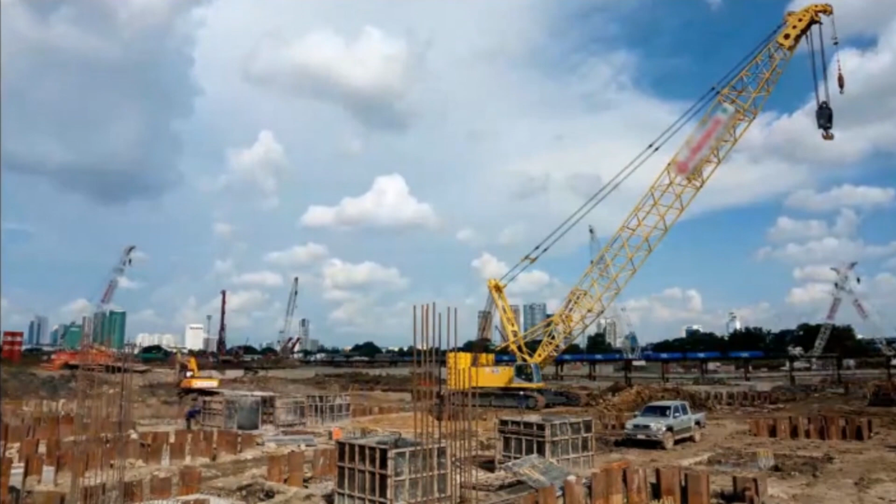Vibrant. Vibrancy is a concept that is deeply ingrained in the building and construction industry, evoking progress, growth, and innovation. We are Vibrant Technology Solutions Incorporated, drawing inspiration from this dynamic spirit. The founders of Vibrant Technology Solutions Incorporated set out to revolutionize the construction industry with a bold vision and a commitment to harnessing the power of technology in construction.

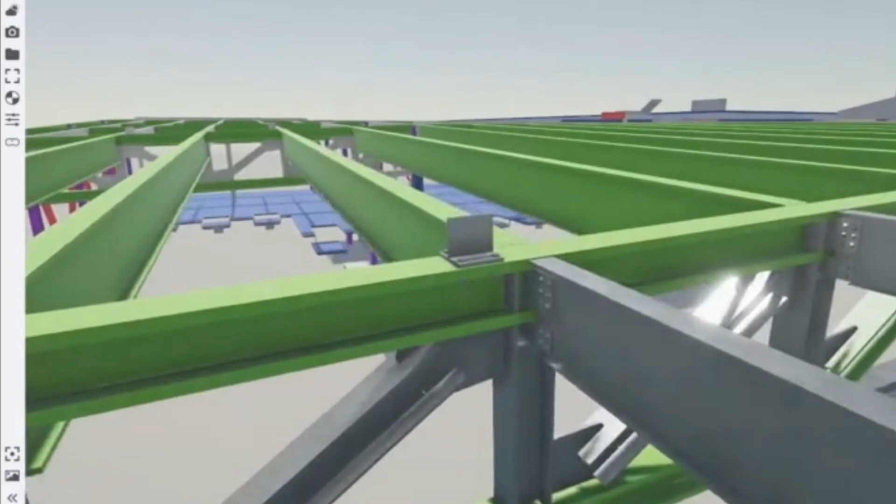Since our inception in 1999, Vibrant Technology Solutions Incorporated, also known as VTS, has been relentlessly and effectively channeling opportunities to our customers to grow and succeed. We are the sole reseller of Tekla Solutions by Trimble since year 2000. As the sole reseller of Tekla Solutions by Trimble, VTS offers a comprehensive range of cutting-edge products and services to the building and construction industry. Our solutions include Tekla Structures, Tekla Tedds, Tekla PowerFab, Tekla EPM, Tekla Structural Designer, SketchUp Pro, and Trimble Connect.

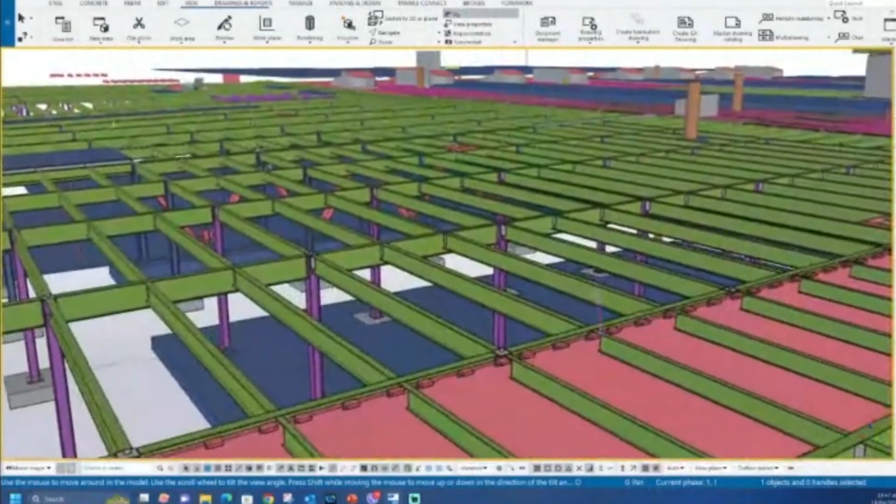We also provide solutions for enhanced project visualization through augmented and mixed reality. Our solution for AR and MR includes XR10 with HoloLens 2 and Trimble Connect AR. VTS is the only authorized training and Tekla Professional Certification Center in the Philippines. In addition, we also provide linear construction material optimization solutions. We offer Raiden Systems, CP Manager, and AutoNest so that construction leaders can optimize their material usage, minimize waste, and streamline their production processes. Overall, we are entrusted by Trimble Inc. with the sales, marketing, business development, and technical support across Trimble's building solutions portfolio. We are one of the leaders of this technology.

We at VTS believe that customer engagement and enjoyment are just as important as delivering top quality solutions. We take pride in channeling opportunities and in fostering a strong sense of community amongst our clients. At the heart of our business, we place a strong emphasis on cultivating meaningful relationships with both our existing and new clients. Our commitment to customer service is unwavering, and we take pride in providing easy to approach local support that is always reliable and transparent. Our goal is that when people think of Tekla Solutions, they immediately think of VTS, a trusted partner and industry leader that is dedicated to helping our customers achieve their goals and reach new heights of success. Vibrant Technology Solutions Incorporated, channeling opportunities. Tekla Solutions by Trimble. Still different, but always better.

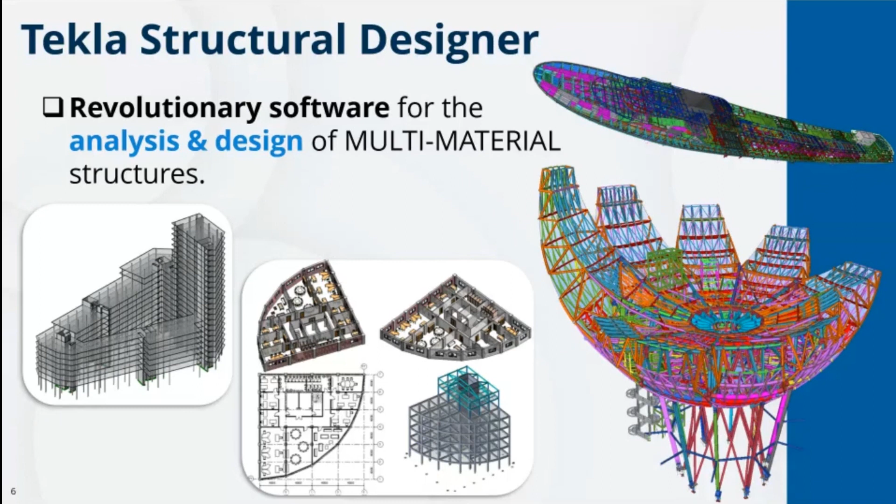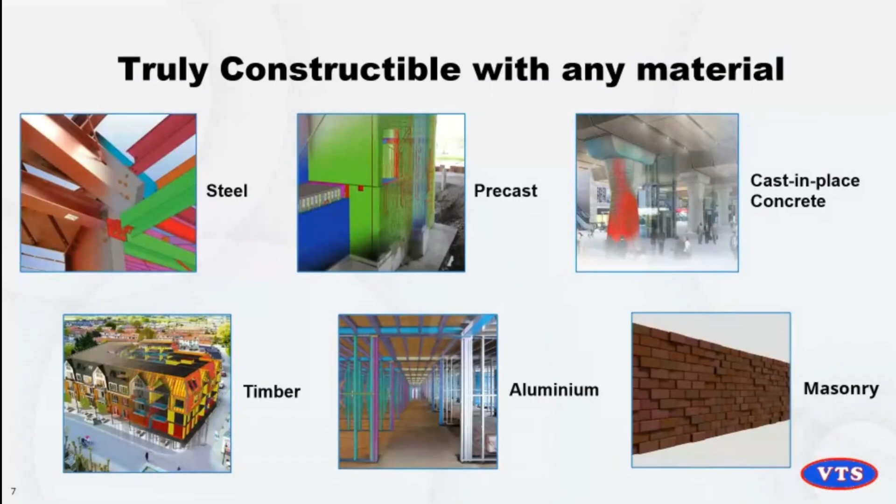So TSD is a solution for faster, more efficient project deliveries regardless of the material. So this is how the software goes beyond traditional engineering tools, allowing you to create data-rich models that streamline structural analysis and easily adapt to changes. With automatic report updates and instant change management, you'll save time and reduce manual work.

So you can also quickly compare multiple design schemes, helping you find cost-effective options for your client in a minute. Plus, with support for a wide range of international design codes, TSD ensures every project meets global standards. So why does TSD matter to you? As industry leaders, you face unique challenges, of course.

We ensure structures withstand typhoons and earthquakes, and we have to meet tight project deadlines while staying competitive in a growing market. So TSD delivers precise seismic and wind loading analysis aligned with NSCP standards, streamlines complex designs for urban settings, and also positions your firm as a BIM pioneer.

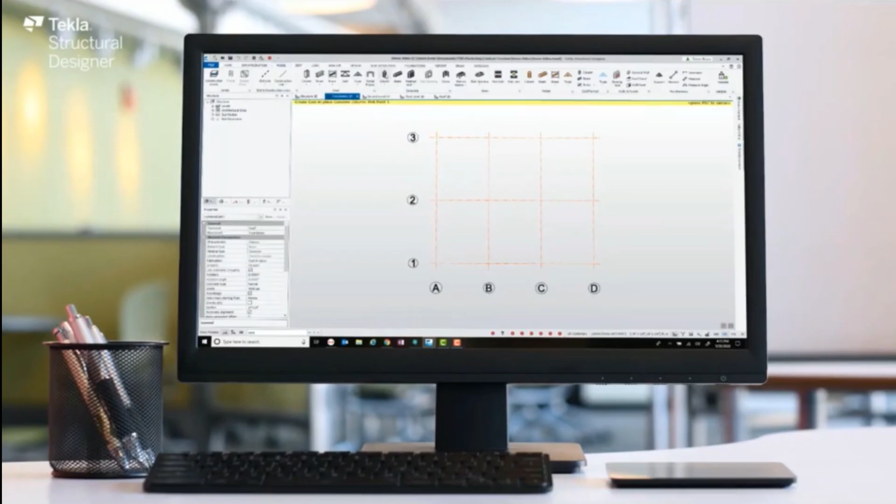So by adopting TSD, you're not just improving workflows, but you're elevating your reputation, winning high-value contracts, and shaping safer communities across the Philippines. So here's a short video for Tekla Structural Designer. Tekla Structural Designer is the revolutionary software that empowers engineers to analyze and design buildings efficiently and profitably. In just 5 minutes, we'll show you how it transforms your workflow.

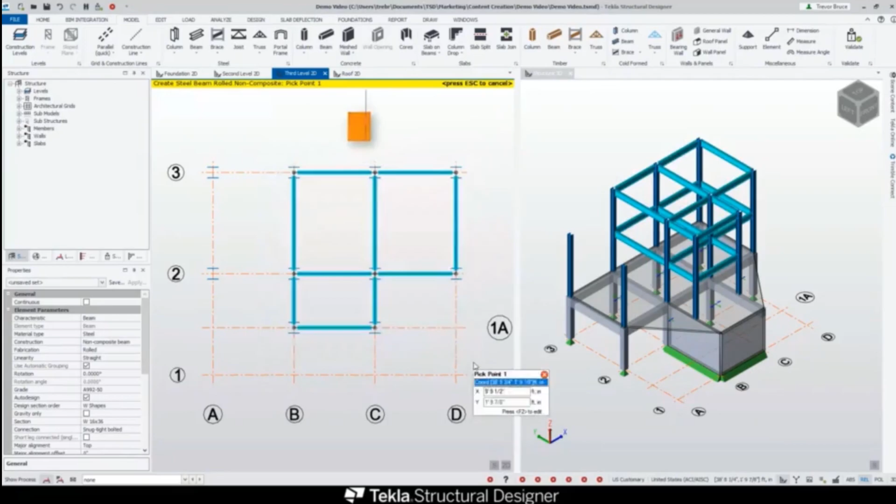TSD is also a fully automated BIM toolpack with unique features to optimize your concrete and steel design. From quick scheme comparison to seamless collaboration, it helps engineering businesses win more work and maximize profit.

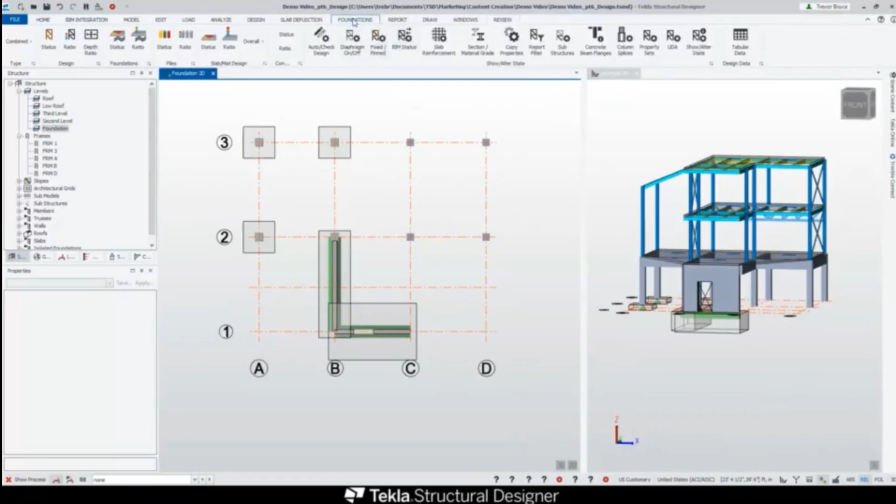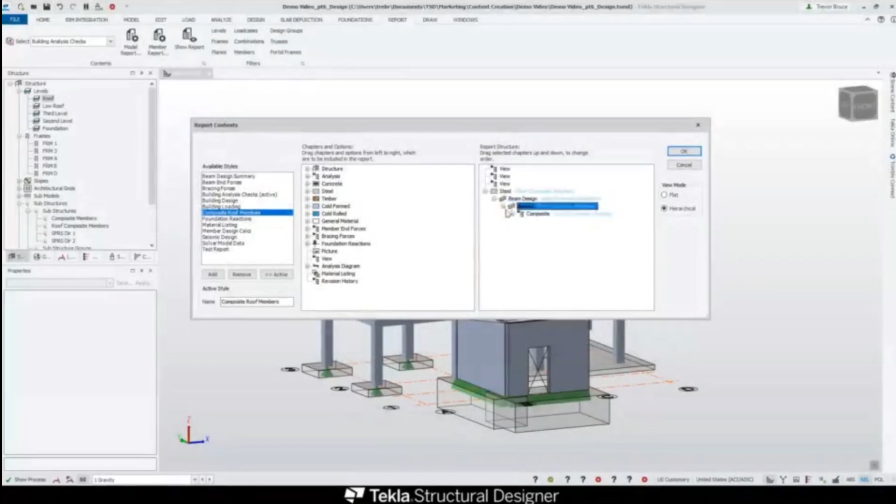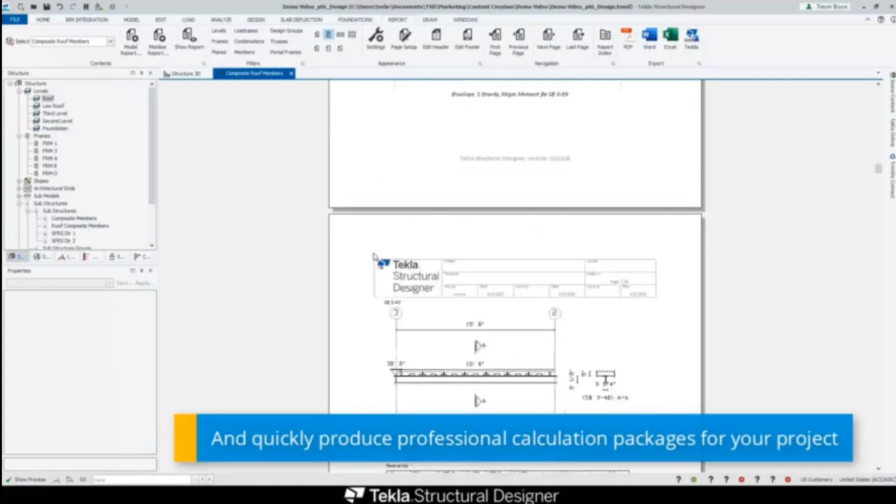So meron tayo ditong pad base, pile cap, strip base wall at saka mat po. And then if needed po na mag-design kayo ng mat and pile, pwede nyo rin pong gawin dito sa loob ni TSD. And sa foundation po, meron siyang generated na reports and drawings po na nakalink na sa AutoCAD. And then at the same time, you can customize po yung report natin based doon sa kung ano yung preference na gusto nating ipakita or ipasa for the permitting.

Okay. So in summary of the key outputs generated by Tekla Structural Designer, it is a powerful tool designed to streamline the work of structural engineers while aligning with the regulatory and documentation requirements. So on the left, we begin with the structural calculation that can be automatically generated by the software. This can be exported to PDF, Word, Excel, or Tedds format, to ensure clarity and transparency in structural design justification. These documents are essential when submitting to regulatory bodies for compliance and approval.

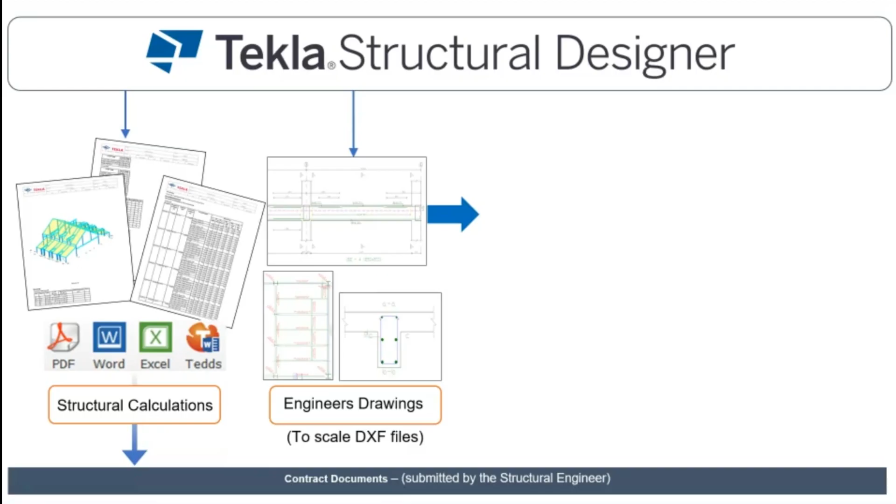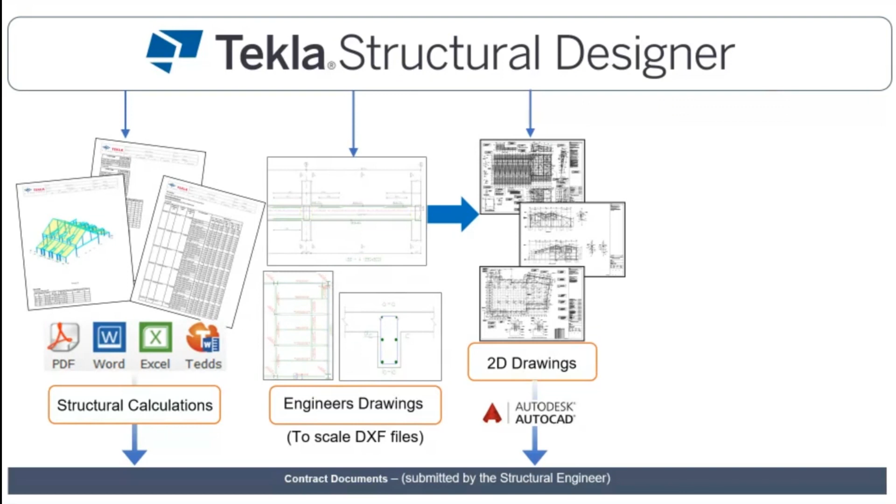So from this calculation, we produce engineering drawings, accurate-to-scale DXF files that form the technical foundation for both detailing and approval. These are particularly useful during permitting. So you can submit po yung ating mga drawings directly na po sa mga local governments natin. They're already accepting na rin po itong mga calculation and engineering drawings na generated sa loob ni Tekla Structural Designer. And then moving further, we link to the drawings using tools like AutoCAD. This includes structural plans, sections, and details formatted to align with the standard submission requirements for building permits and technical reviews.

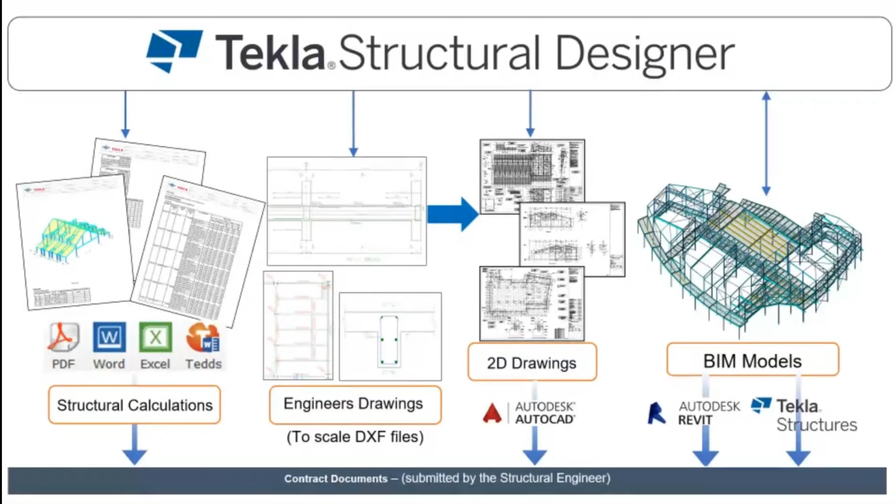So finally, TSD supports the creation of the intelligent BIM model, which can be exported to Autodesk Revit or Tekla Structures, and these models promote interdisciplinary coordination and improve constructability. For the government offices, this ensures that what's approved on paper aligns with what's built in the field. So in summary, all outputs from the calculation to BIM are consolidated as part of the contract documents formally submitted by the structural engineer, making TSD a reliable tool for compliance, documentation, and streamlined review process.

And then for experts like you, efficiency and precision are non-negotiable, but TSD delivers both. It reduces design time by 15 to 25% by automating analysis and design in a single model. This eliminates manual data transfer, cutting errors significantly, with real-time collaboration through Trimble Connect to ensure the architects, engineers, and contractors are aligned, even across the Philippine archipelago. The result: faster project delivery, fewer revisions, and higher profitability. That gives your firm a competitive edge in a demanding market.

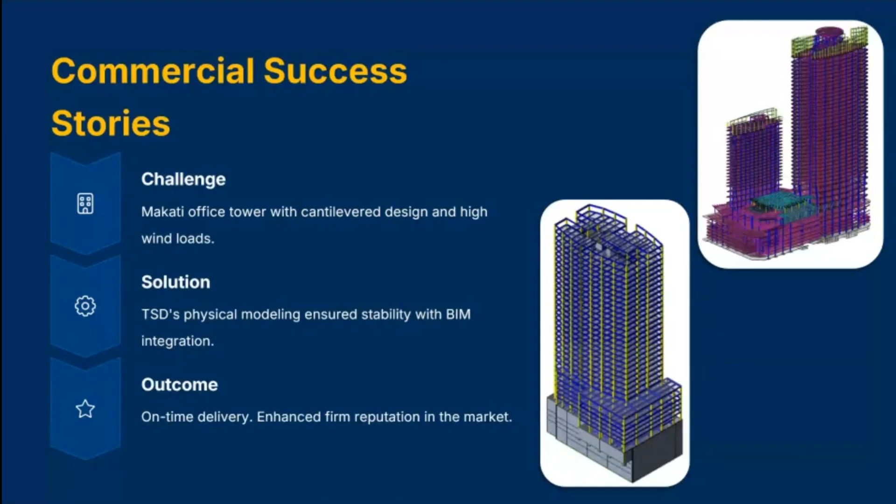Okay? So now let's explore TSD's impact on commercial projects. Using TSD, engineers model complex geometries and analyze high wind loads, ensuring structural stability without compromising aesthetics. Also, BIM integration allowed seamless collaboration with the architects, delivering the project on time and enhancing the firm's reputation. TSD's ability to handle intricate designs makes it a go-to solution for high-profile commercial projects that define our skylines.

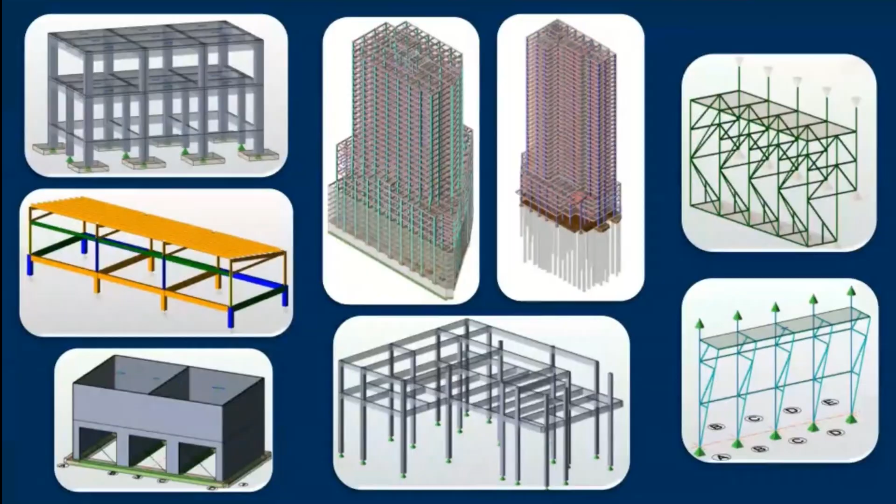Sustainability and resilience are critical in our typhoon and earthquake-prone country. TSD enables early-stage carbon footprint analysis, and it optimizes material use for green certification. This is vital for projects like a cultural center or public buildings. Its robust seismic and wind load analysis ensures the design meets NSCP standards, protecting lives and investment. For instance, a recent project optimized concrete use, cutting emissions by 15%. So with TSD, you're not just building structures, you're creating sustainable, resilient communities that withstand our unique challenges.

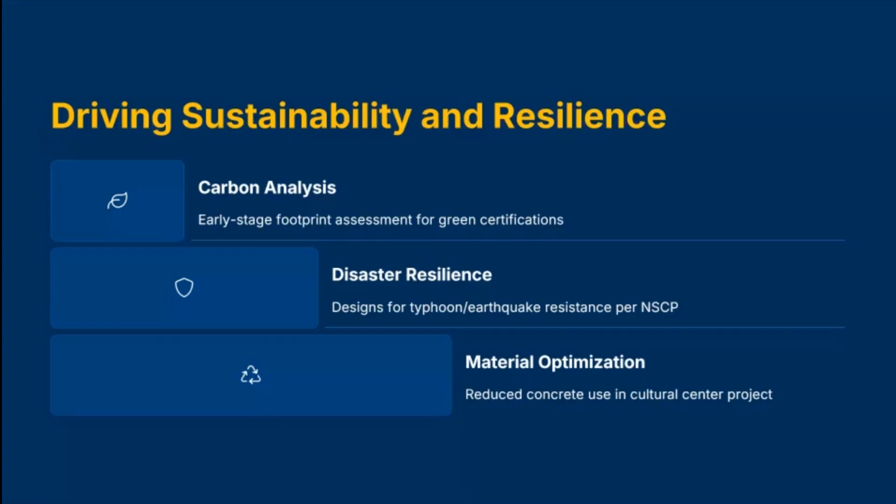But why do we have to invest in TSD? The ROI is undeniable. Some firms report a 15 to 25% faster design cycle that saves weeks on a project. It also optimizes material, cutting costs by up to 10% as seen in a major steel project. Faster delivery attracts premium clients like those in PPP infrastructure deals, boosting revenues, and TSD's BIM leadership positions your firm to secure high-value contracts in a $65 billion market. With local support and training, TSD's transformative impact justifies its cost, delivering payback within 6 to 12 months and a lasting competitive edge.

Collaboration is key in our complex projects, especially across the Philippine archipelago. TSD integrates with Trimble Connect, enabling real-time model sharing among architects, engineers, and contractors. For example, a firm streamlined a commercial project, cutting coordination time by 20%, thanks to TSD's BIM integration. Whether you're in Manila, Cebu, Davao, or outside the Philippines, TSD ensures everyone stays aligned to reduce errors and delays. This seamless collaboration empowers your team to deliver large-scale projects with precision, no matter the distance.